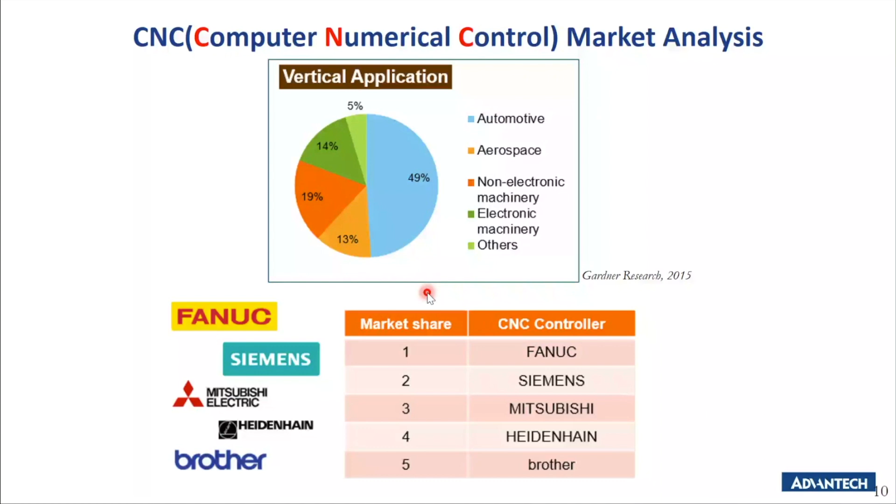Number 1 will be the Fanuc. Number 2 will be the Siemens. Number 3 will be the Mitsubishi. Number 4 is the HEIDENHAIN, and then number 5 is the Brother. So these are all the very popular CNC controllers available in the market.

So when it comes to CNC machines, some of the common CNC production pain points we are going to share with you. In our customer production site, most of the CNC machines are actually offline, meaning they are not connecting to any internet, so you cannot manage them through networking. So if you want to connect it to some software, usually these software are actually very expensive. To those production lines who want to do smart factory or industry 4.0, it is actually kind of overqualified when it comes to project budgeting. So it's not meeting what the customer really needs, right?

And then when you are using a CNC machine, usually in their process program system, you need some data from the machine. So what they need to do is take out the CF card and manually update it. It's time consuming and really very labor intensive for them.

Also another thing customer would like to do is to collect this data and then push this data to some of their existing system. But the challenge is because you cannot access the CNC controller, therefore your data cannot be integrated with some of the existing systems, like the SCADA system. So these are all the pain points from the CNC machine production line and also at the end user side.

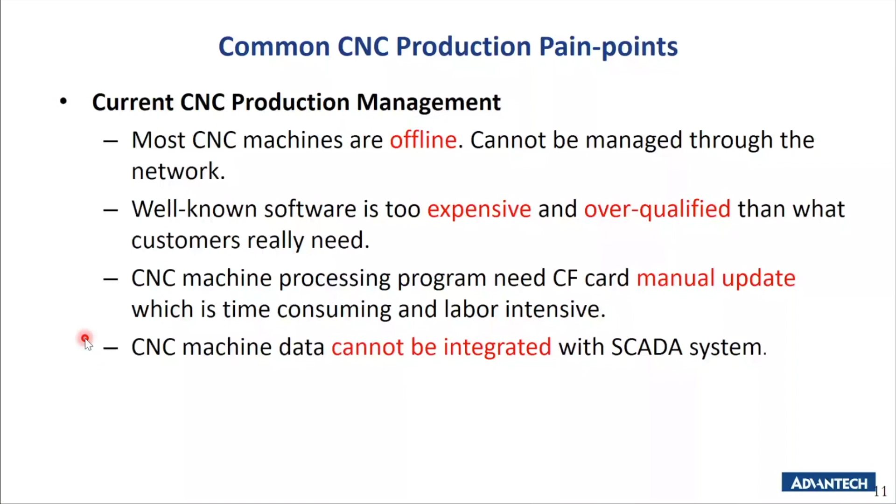So what about our CNC Edge smart box? You can imagine, just now we have such a wonderful software, which is the WebAccess CNC, you can connect to the CNC controller. So we actually put this CNC software inside Advantech's industrial PC. It is a very small form factor, it comes with features like some powerful Intel CPU, and it also has built-in SSD storage for you.

So once this pre-installed WebAccess CNC is built inside, you can actually do the connection of up to 5 CNC machines. Another thing this CNC box can do, it also can connect to the cloud of the Advantech WISE-PaaS. And this box is also expandable, even if you want to do connectivity by wire or wirelessly, like Wi-Fi or LTE, it is also possible. So because Advantech's industrial PC is compact and fanless design, it's very good for your harsh environment. You can actually DIN rail it, and it also supports a wide power range and operating temperature.

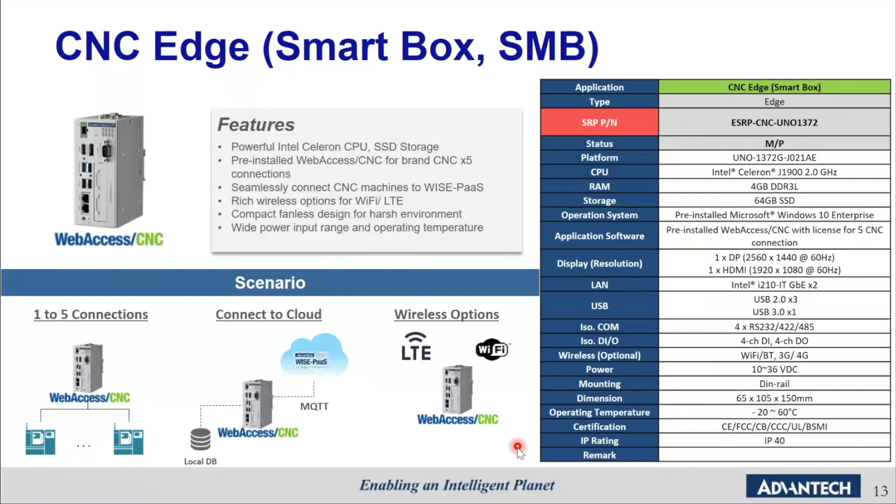So just now we talked about everything about the WebAccess CNC. Now I would like to give you some of the good features for this software. Basically, we will be touching about 7 or 8 features.

The first one will be the overview. Once you log into the WebAccess CNC software, you will go to the overview here. In this overview page, you will be able to identify a lot of information - your device name, main block, the current execution program, status, alarm status, and part count. So basically it's a very good overview for you. You will know whether it's now busy, idle, in alarm status, or whether the machine has been disconnected.

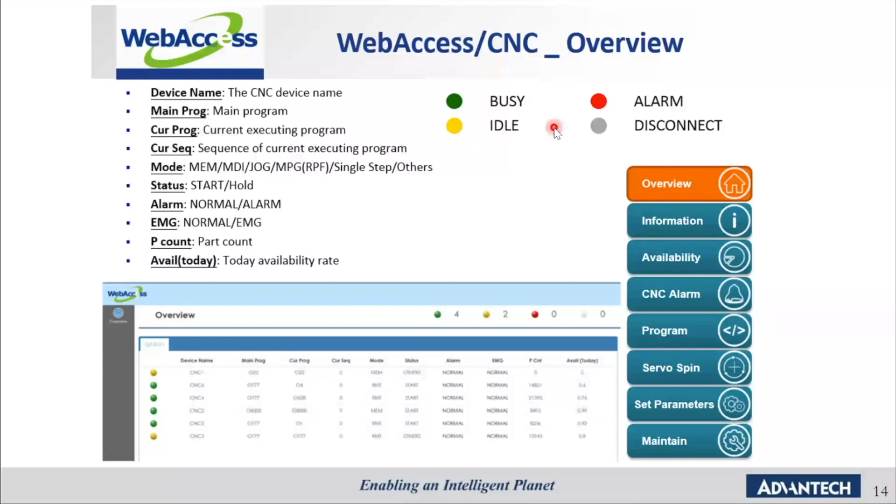Second, you will also know the information about this CNC controller. Here we will be talking about information particularly to the absolute and relative position, some of the part count information, the CNC operating time, and also the G code. This information can be easily obtained from your CNC controller and linked to our WebAccess CNC software.

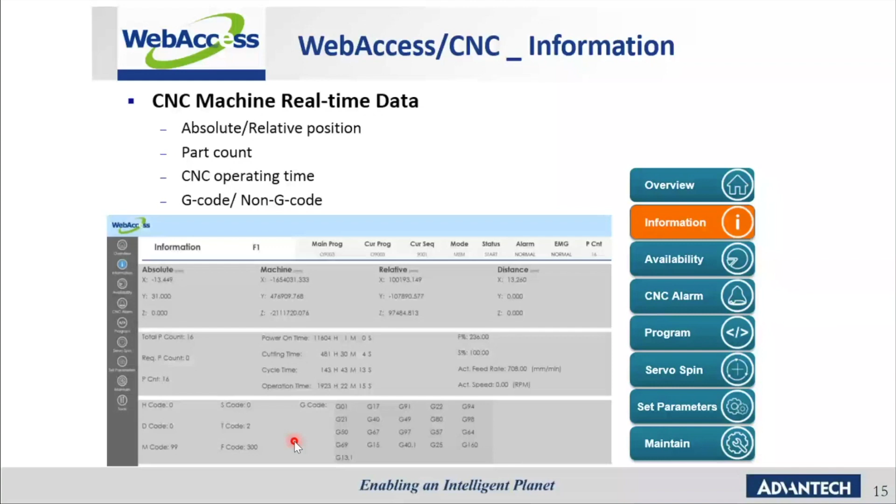Number 3 is always important - knowing the machine's availability. The query tool provides the detail of CNC availability to handle such kind of production efficiency. So if you do the setting, you try to do the query, you want to know a certain start time and end time by a particular date and time. Once you submit it, it will generate the information that you requested. So it's easy for you to know the status, the start time, end time, and total time taken for your query.

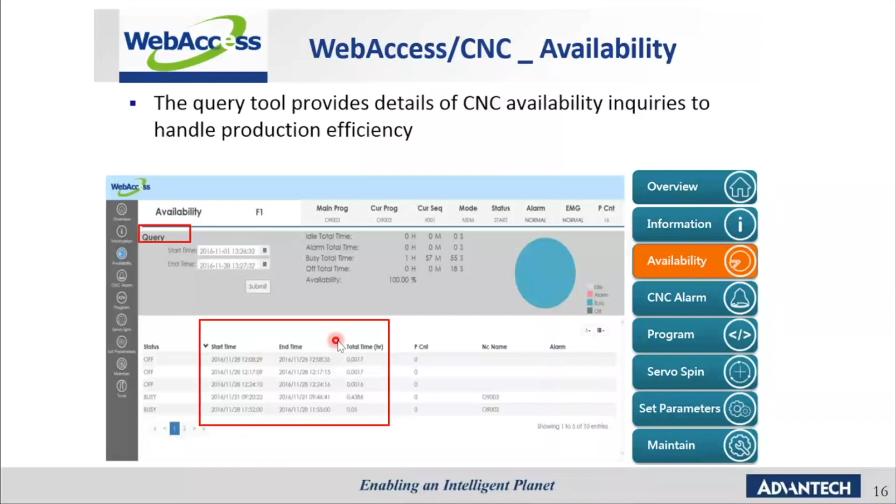Now, next we will let you know about the program. The CNC program is actually for the user to provide an upload and download function for the file they want to use, and an edit interface to program the NC files. These features give you the flexibility to input or export information from a CNC controller. Once you go to this page, you are able to know the file name, the file size, the last write time, and the remarks. So this is also very helpful.

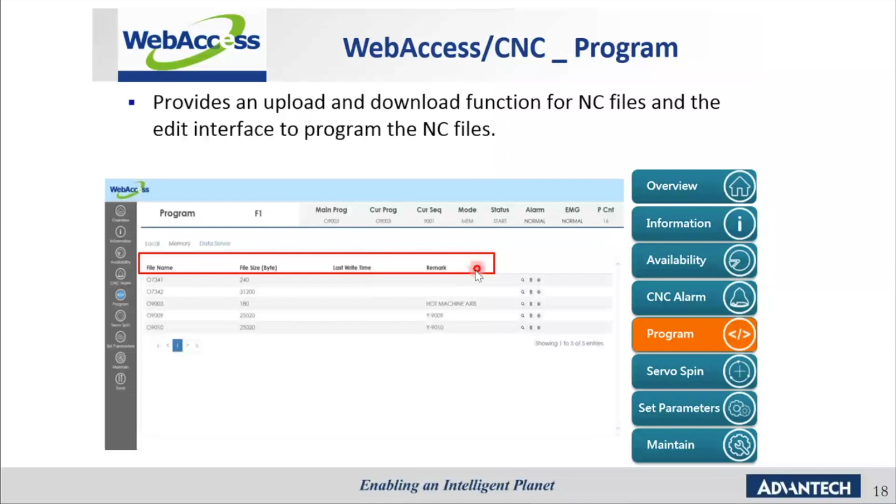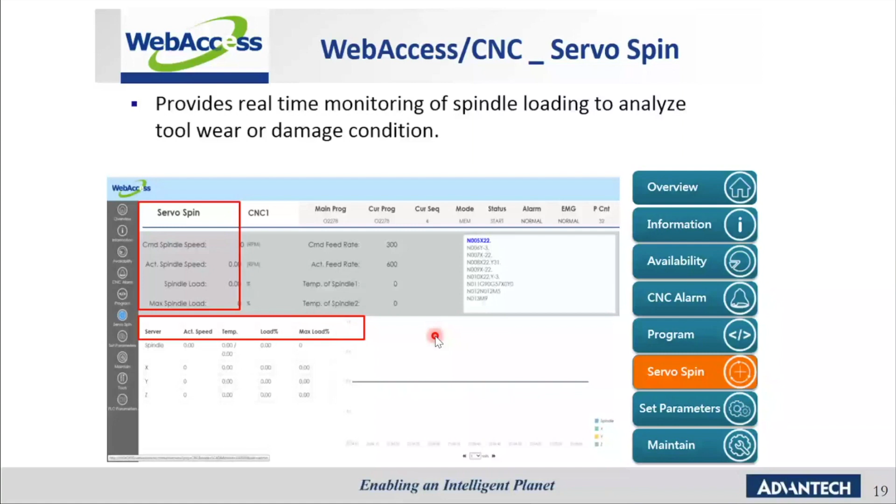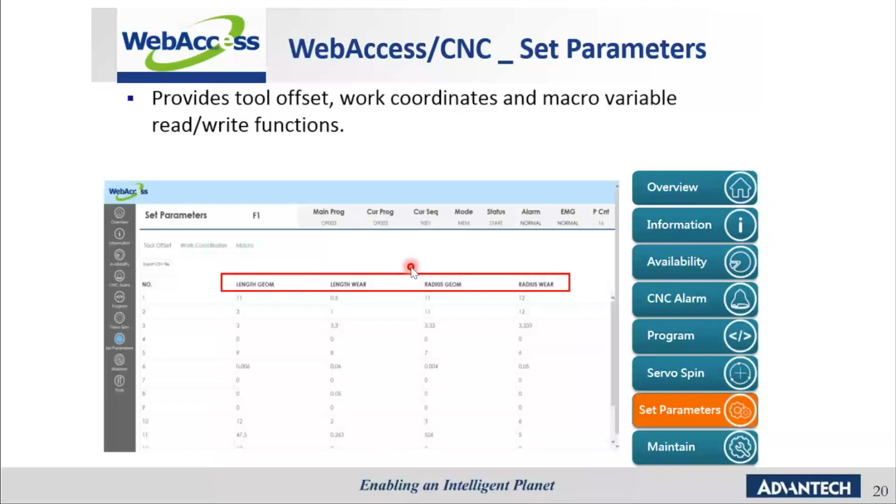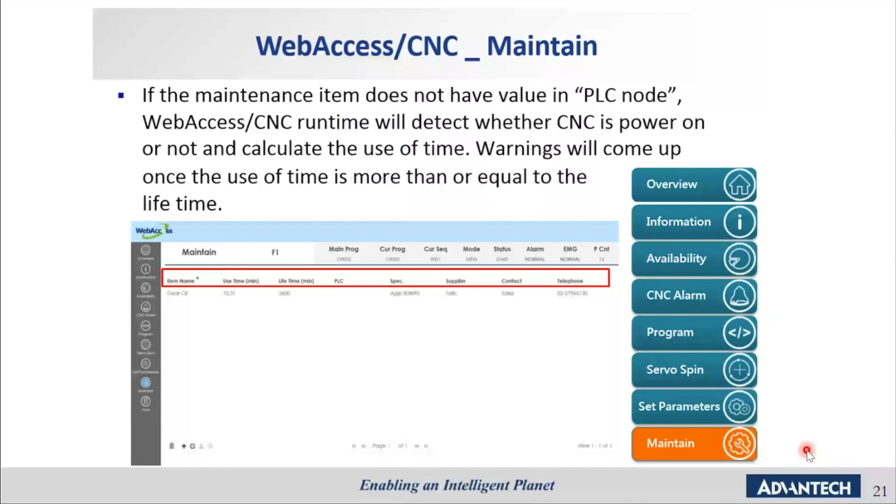All right, so that's all about the CNC WebAccess software. Now the next question from customers is, how do we move forward? How do we enable such kind of CNC monitoring project?

Three steps. First, you have to determine your requirement. You have to discuss how many CNC machines there are, what brand, what CNC control model, what kind of service is the customer's expectation - are they trying to do visualization of the machine operation on the production line, and does the customer have an ERP or MES system, because this is helpful when the customer wants to push this information to integrate with our CNC software.

Second, you need to decide how you want to connect the machine by our CNC Edge. We shared that our CNC Edge can do up to 5 connectivity, so you have to calculate how many CNC boxes you need for your project. And then you want to collect the data - is this CNC box just used as a gateway, or do you want it to push information to your existing backend SCADA system?

In some cases, customers wanted to do more than that. They wanted to make use of the dashboard features of Advantech, which we will share more later, and we support both the cloud service and the on-premises solution.

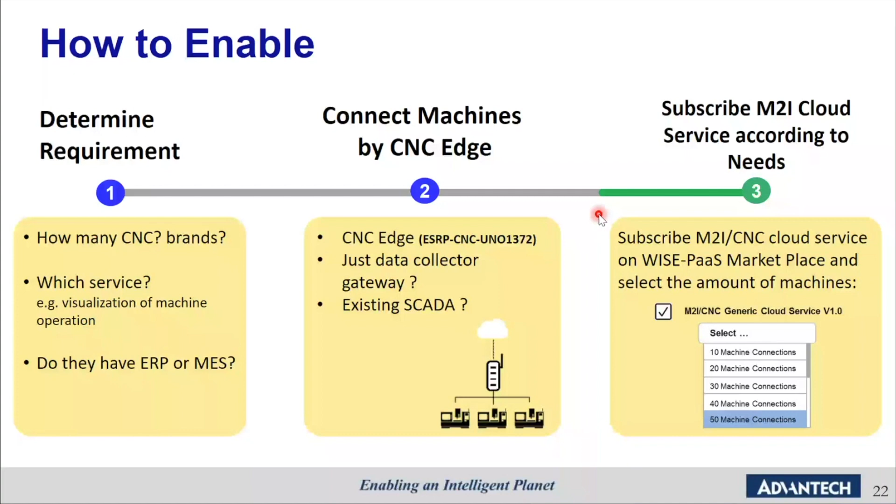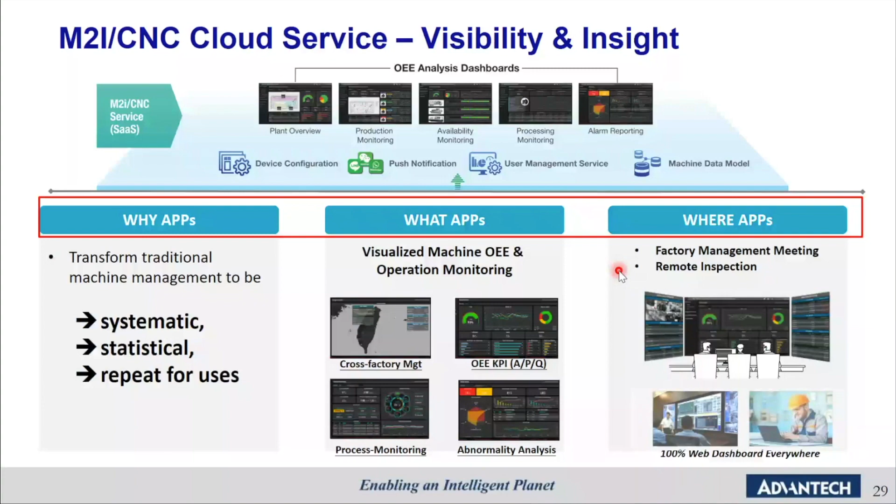Okay, so about our solution offering. Just now we mentioned we have the edge computing to help you do real-time collection. We also mentioned we have our WISE-PaaS cloud, which has all this kind of built-in dashboard ready for you to use.

So in this page, what we are trying to share with you is that besides doing the data collection from the CNC machine on the production line, the factory site may already have some existing ERP or MES system where they handle their work ordering system, production line system. They would like to actually integrate this information into our dashboard.

So this is where we have the flexibility, because our platform actually supports an open API. So if you know how to write a simple script, you can actually push all this information from your other system, from the factory side, and then combine it together with those information from the CNC, and integrate into our ready dashboard features. And of course, if you want to add on some other IoT project, because of the flexibility of our WebAccess CNC software, you also can do the integration right here.

We are talking about things like the Modbus protocol, things like the OPC UA protocol, etc.

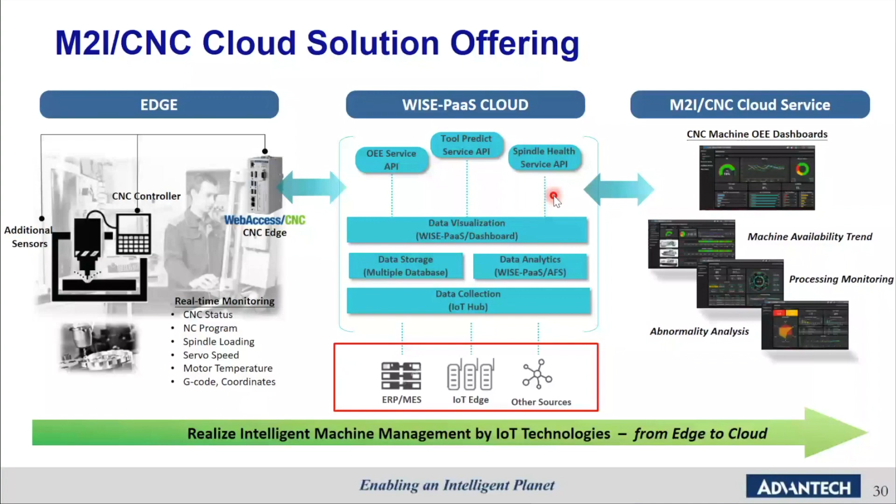When it comes to machinery and MES data integration on our dashboard, the three things we want to help achieve are machine monitoring, your work order process, and tracking your production losses.

This is the kind of dashboard you'll get using our solution. It gives you a very good overview of availability, total downtime, and work order information. You can even insert your production line floor plan and get indications of where the CNC machines are and their existing status - running, idling, or down. On the right-hand side, it also gives you work order information.

This is where your MES system or ERP system can integrate information all together into this single page, giving you a very good overview of the status and what's happening on the production floor.

In summary, you will know all the performance and achievement, get real-time CNC monitoring status, know the alarm history on this page, and it's always important for the operator and manager to take note of the work order progress at the moment.

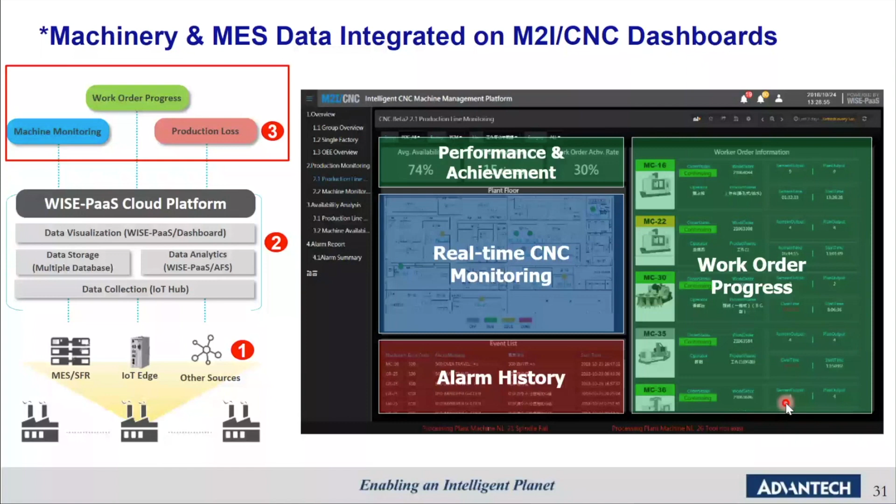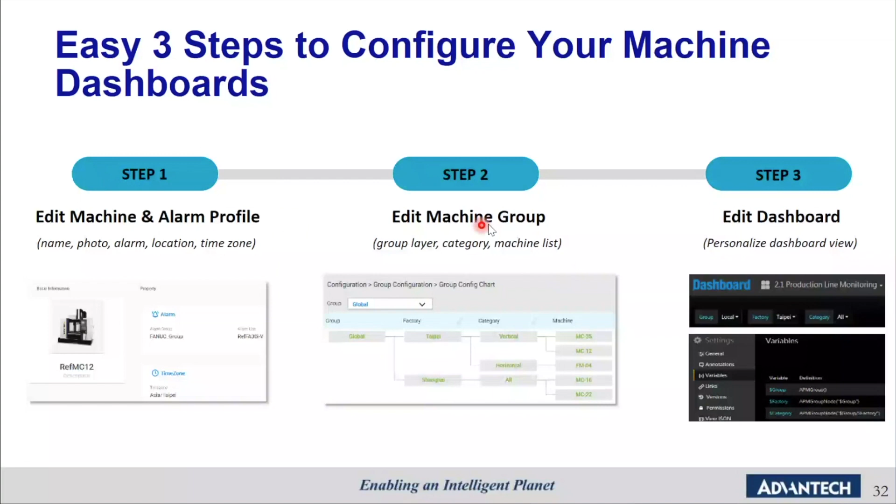Here are the 3 simple steps to use our dashboard. Step 1, edit the machine and alarm profile. Step 2, edit the machine group. Step 3, attach and do the settings of the dashboard itself.

For step 1, the machine and alarm profile - here's the user interface page, let's look at how it looks. You can go into system settings and do your reference property setting. This is where you configure your machine profile, including photos, alarm list, time zone, and other important information from your CNC machine.

For the configuration and alarm configuration, when you go inside, the interface will look like this. You can set up your alarm list according to the CNC controller's model and its manufacturer, which is very useful for you.

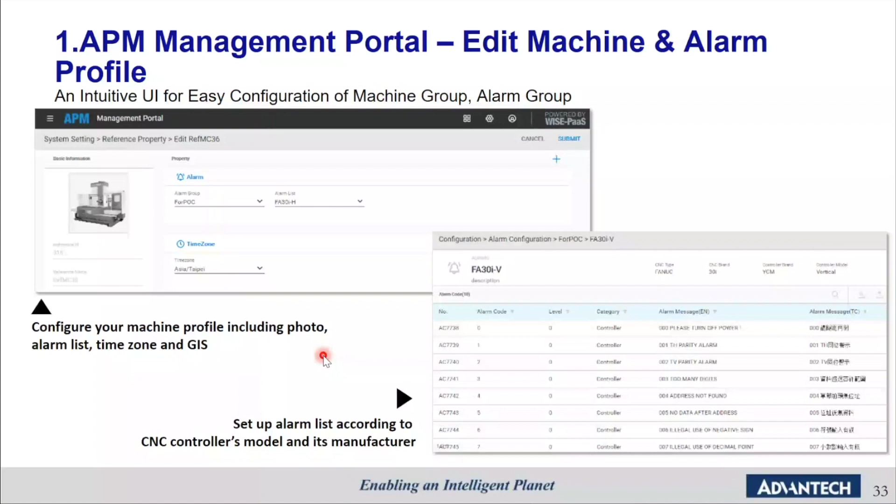Step 2 is for you to edit the machine group. When you log in, you can do the group configuration, which provides you a group configuration chart. By looking at this chart, it's easy to know the connectivity, the relationship between the grouping.

You have a global enterprise, with different factories, for example in Taipei or Shanghai. You can categorize the vertical of the CNC machines, maybe by different customer, or by different type of product you are making. For machines, you can always name them into different machine names.

Once you click it, it gives you all the detail property which we already entered on the last page. So it's to create your machine group according to your production layout, and then you can always click and view the machine info easily.

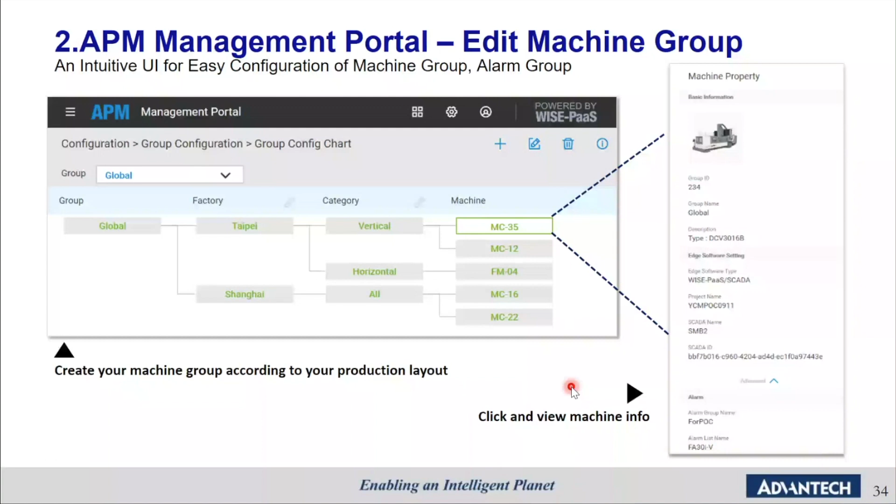Now let's talk about the dashboard itself. When you do the dashboarding, you can imagine such a wonderful, nice dashboard as the achievement and result. At the center, you have one very good interactive dashboard with a good overview of the whole status - production line monitoring, overall equipment effectiveness, OEE analysis, and alarm report.

On the left-hand side, you have some focal points which are very important for you - production line zone monitoring, the machine list, and also the CNC error message.

On the right-hand side, you can have a management scorecard, which is useful for integrating all your work order achievement information - the OEE summary, quality, defect and yield rate, and important downtime summary information. This dashboard can really give you a very good overview of the whole situation and what's going on in your production plant.

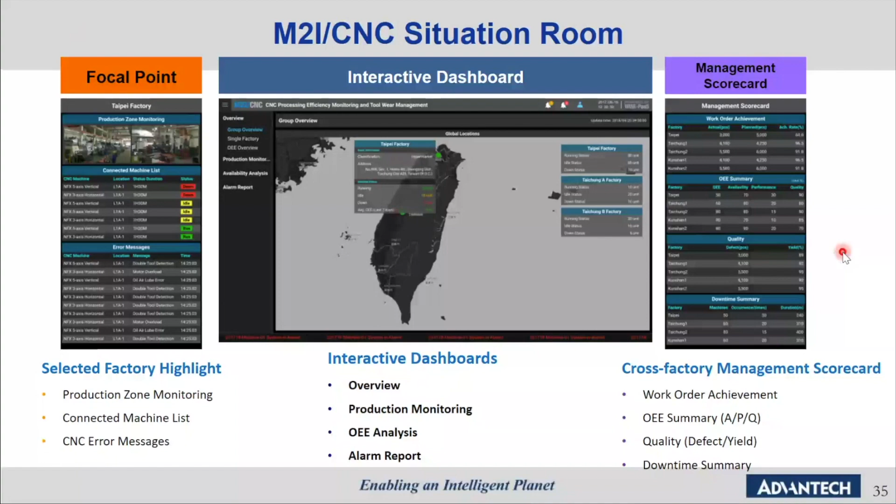I'm going to go a little quicker here with some of the dashboard for the next few pages. For the group overview, you can imagine information like this - real-time info from each site, a good overview of the global group manufacturing sites on your map. As and when you want to know what's going on, you can simply click to different plants and get access to it.

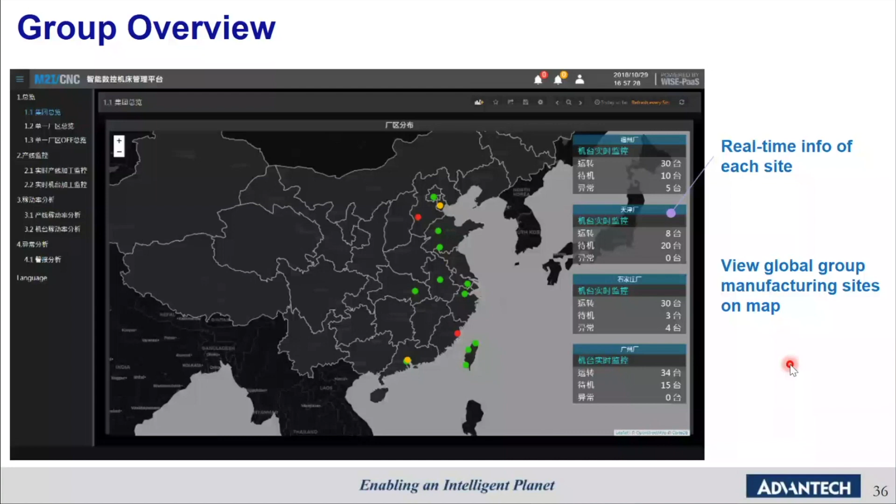When you zoom into the single factory overview, it can give you a lot of comprehensive information for a quick review. We talked about the plant floor, OEE, machine status, and all the APQ, and top 5 production information, the error event, and the downtime machine.

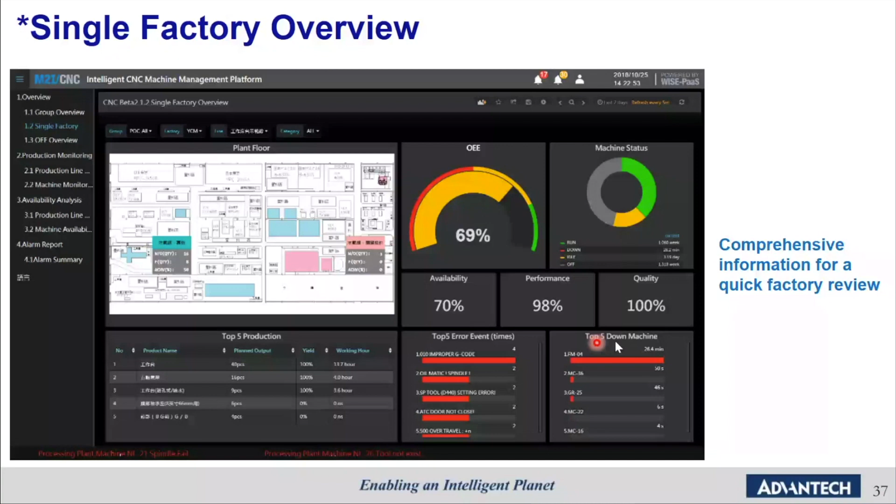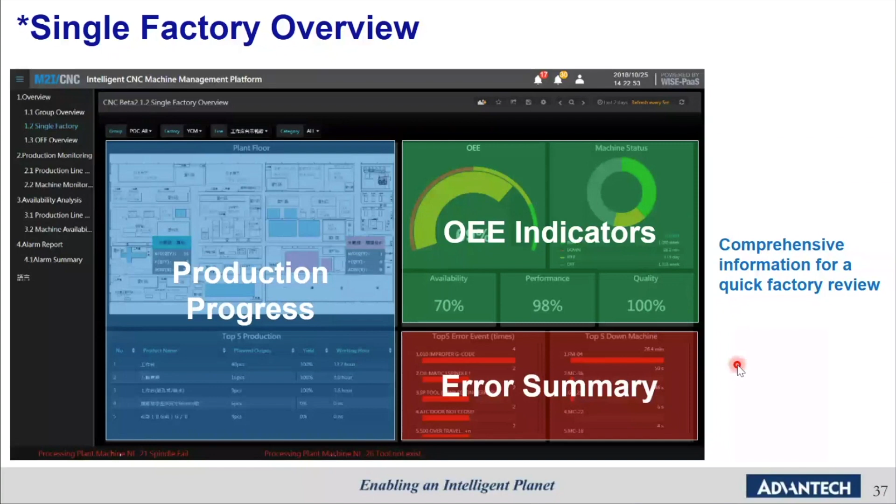You will know all the production progress at the moment, and here you will know all the OEE indications, all the indicators, and also the error summary. So this is a very good and useful single factory overview for you, about the factory's OEE.

When you zoom into OEE, you would like to know the OEE trend chart. It gives you a lot of flexibility by choosing different dates. For example, you want to know how the OEE trend chart looks for the past week - you can do the setting here. Once you query, you will know the comparison: the top 5 work hour abnormality, the yield rate, the error event, and the top 5 down machines, so you can look into it and check things in more detail.

So here's the OEE trend chart. How the performance, quality, and availability is all available on this page.

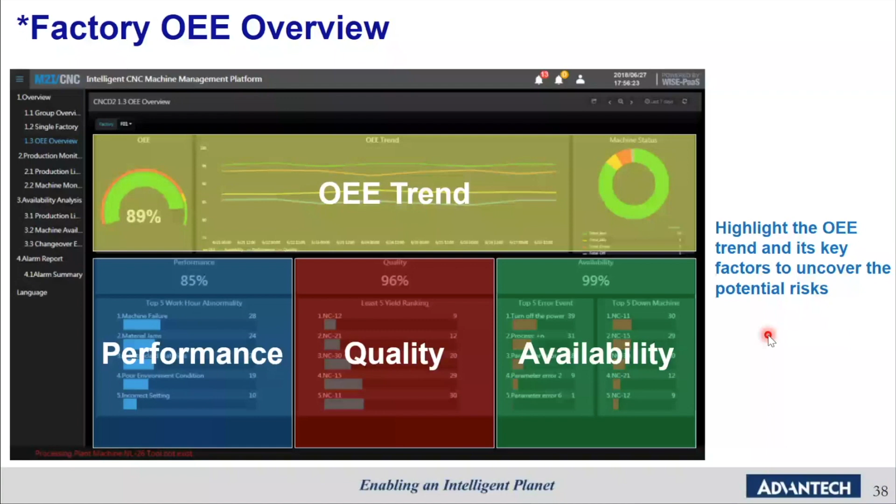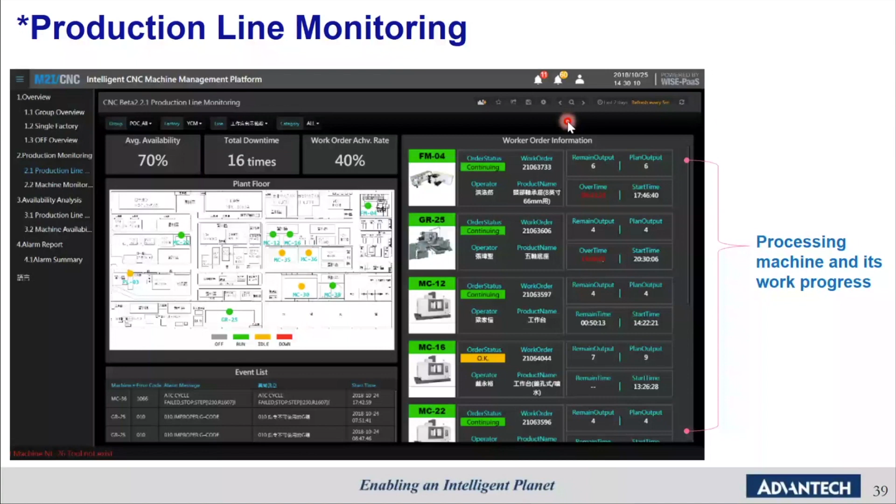Next is about production line monitoring. This is particularly zoomed into the work order information, because it's always important to know how is the progress of each machine, and how is the work order - are we meeting the work order expectation, how is the remaining output, and how is the plan output at the moment. This gives you a very clear and easy overview, so here you will know the real-time machine status on the plant map.

When you zoom into the CNC machine itself, now we are talking about machine monitoring. You will be getting information like how is the temperature of your CNC tool - temperature monitoring of the CNC spindle and multiple axes. It really gives you very detailed information, even by different axes, so you know when to replace or change a new one for your CNC spindle.

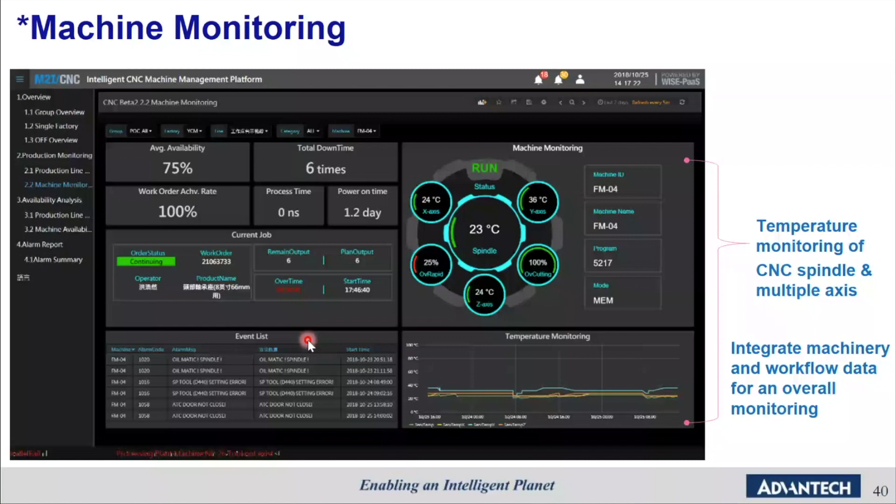And then to integrate your machine and workflow data for an overview of monitoring - how is the trend chart, how is the temperature monitoring trend chart, and also the event list will be available. So you will know all the work progress for today and also the critical parameter monitoring.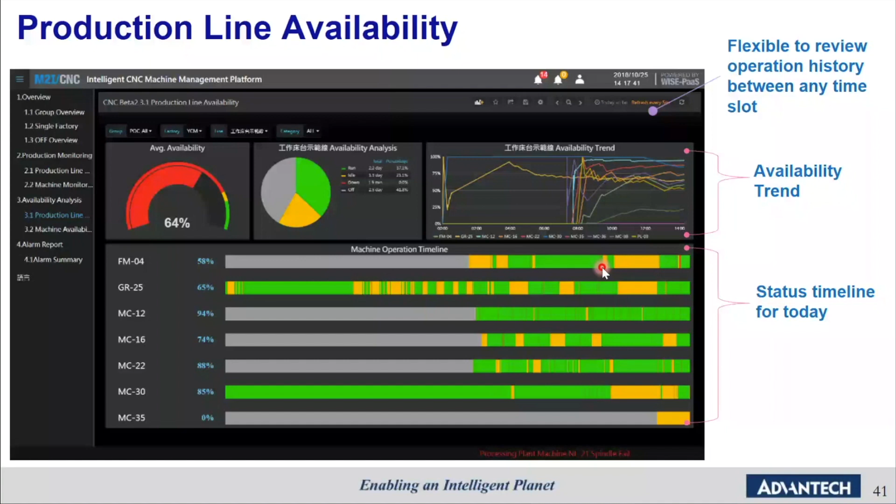This page will give you detailed information about the production line availability. With the similar idea, you line up all the different machines on your production floor, with indications of the runtime, the idle time, and the downtime. This gives you a very good and straightforward information for you to check with your production line, engineer, or manager.

Similarly, when you want to zoom into not only the production line but a particular machine's availability, this is the kind of dashboard you can get. By different machines, you can actually have the machine status of the daily trend and also the machine's status composition.

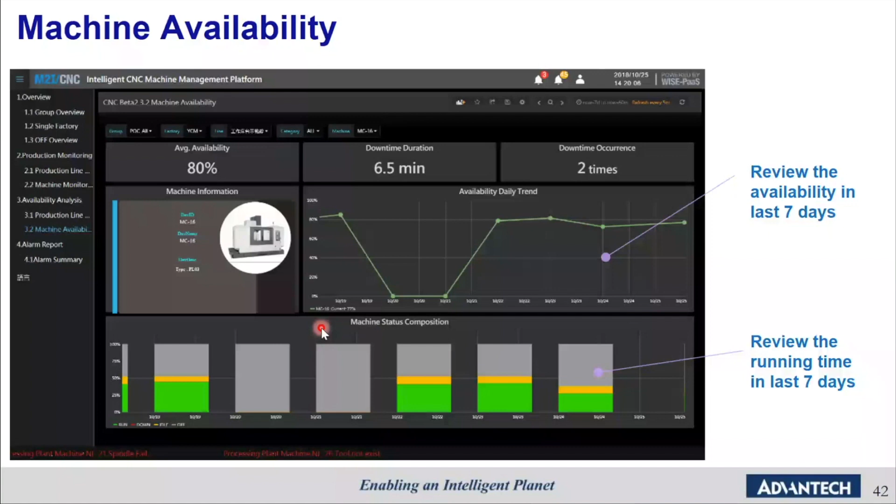Here comes the alarm report. When you zoom into the alarm report itself, it can always give you the counter and information about your critical alarm and also the warning alarm. It's very useful information, getting things like the top 10 alarm event by occurrence, and also the top 10 alarm information by duration, including information such as the error code, etc., and also the alarm trend chart.

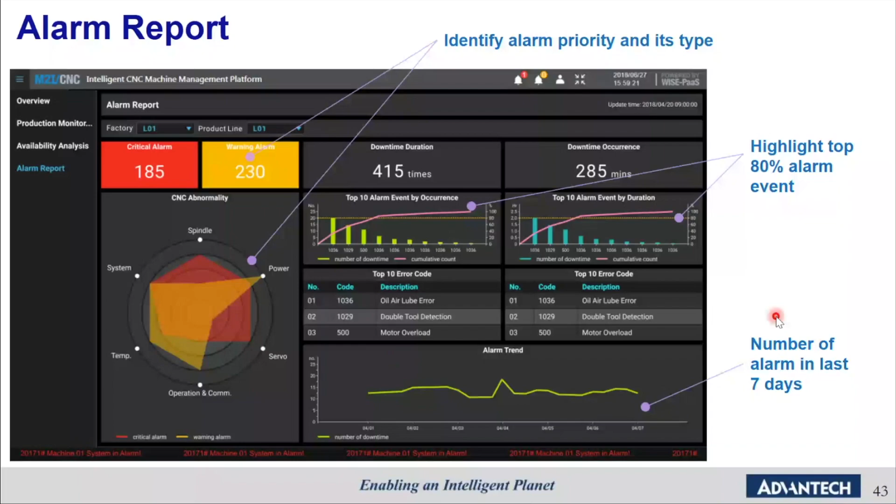Okay, so just now we also have covered all the dashboard functions and features. I'm glad that you are feeling extremely useful and also excited to know Advantech has such a useful solution for CNC management.

So next we would like to share with you some of our successful stories. Particularly these success stories are given by our Thailand team, because in Thailand our team has deployed this kind of project very early, and in Thailand there are a lot of automobile and precision engineering companies.

So project background number 1. You can see this kind of CNC machine on site. This customer manufactures tractor diesel engines and common tractor parts, so they are using a lot of CNC machines.

So how did we use our CNC solution to help them? The bottleneck is, of course, like we mentioned, most of the CNC machines are offline—you cannot connect them to the network. And then it's too expensive, over-qualifying. There's a lot of manual work and it's labor intensive, and you cannot do data collection and push this information to the existing SCADA system.

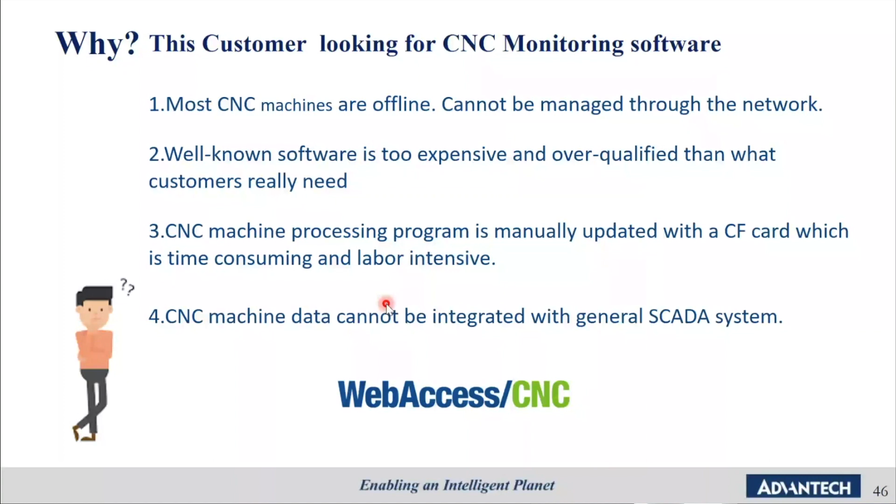So with our solution, we are able to help them do the CNC data collection. Because our software supports the OPC protocol, it is able to push this information to the customer's existing SCADA system, so the customer can achieve what they wanted at the back end. So this is how we helped them.

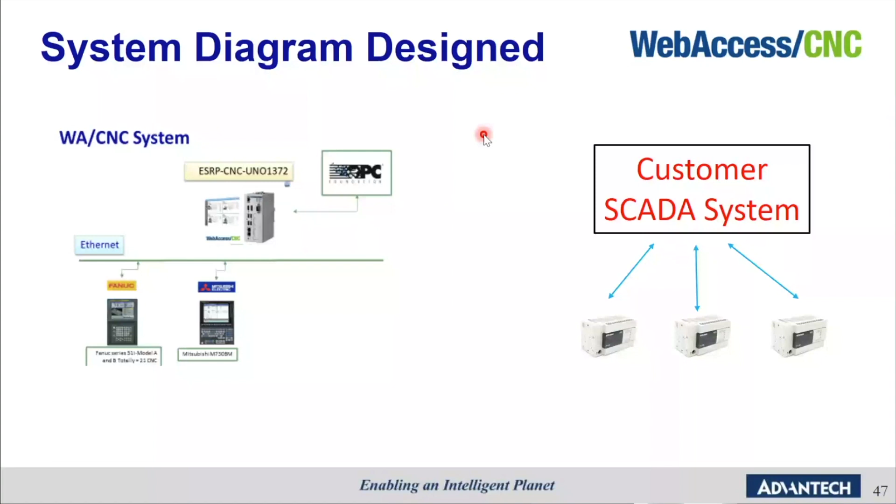So this is an example of how they connect to the Mitsubishi M-series CNC controller. When you connect to the Mitsubishi controller, you can expect this kind of information from the controller, and these are the kinds of information we can access and then push to our WebAccess CNC gateway.

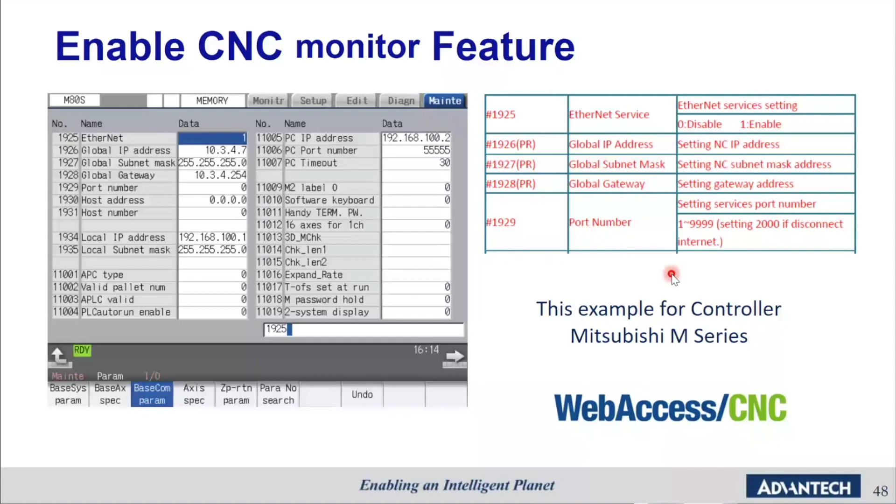And this is an example of the FANUC controller, which is also the number 1 very famous CNC controller worldwide. So we are also able to collect this kind of information and access it through our WebAccess CNC software.

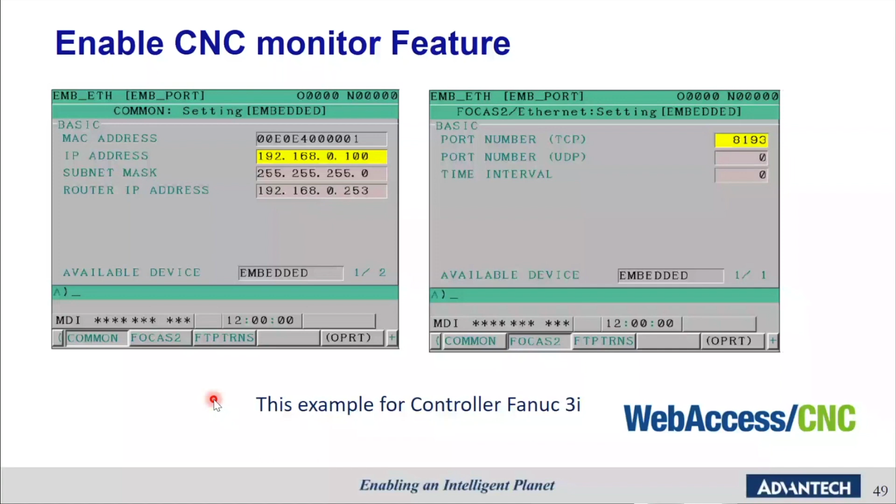So with the data collection, you can expect this kind of information. Just now we talked about all the useful CNC dashboard features, and all the information can be obtained here.

So the value-add information given and fed back by the customer really helps them reduce a lot of CNC downtime, because now you have good and immediate information to know the machine status. That's why you can react very quickly and assign the right manpower to tackle the right problem. So this will definitely help you.

And then there's a lot of flexibility for them, because previously they couldn't connect the data and had so much manual work. Now they have the flexibility to collect data from different CNC machine types and different CNC brands.

And for them it's of course much easier to meet their KPIs, from their technician's point of view or their production engineer's view, because now everything becomes so easy, visible, and transparent for them to manage and adjust accordingly.

And with all this information, such as OEE availability, material planning or check-in, or how the work order material is progressing, this information is always handy and easy for them to plan things ahead—for example, to order shortage materials in advance.

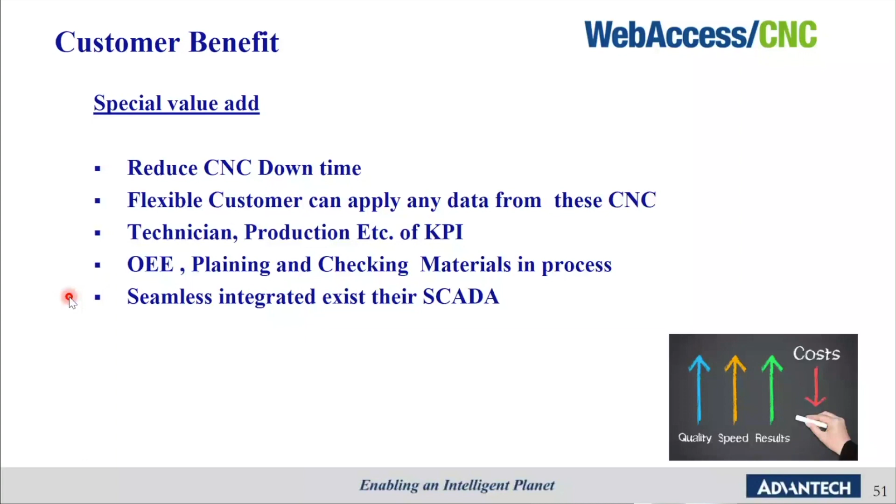So the key point summary is our CNC software—the project has been really successful, because it was easy for them to apply it to their existing old SCADA system. And based on feedback from our team in Thailand, no one else could actually do the connectivity from the FANUC CNC controller except Advantech's WebAccess CNC software.

So this is the second and last project I want to share with you. It's a similar concept—this time the manufacturer makes electrical mechanism parts. With a similar idea, some customers may have SCADA software on site, some may not, and some customers have the problem that they cannot integrate with their existing SCADA system.

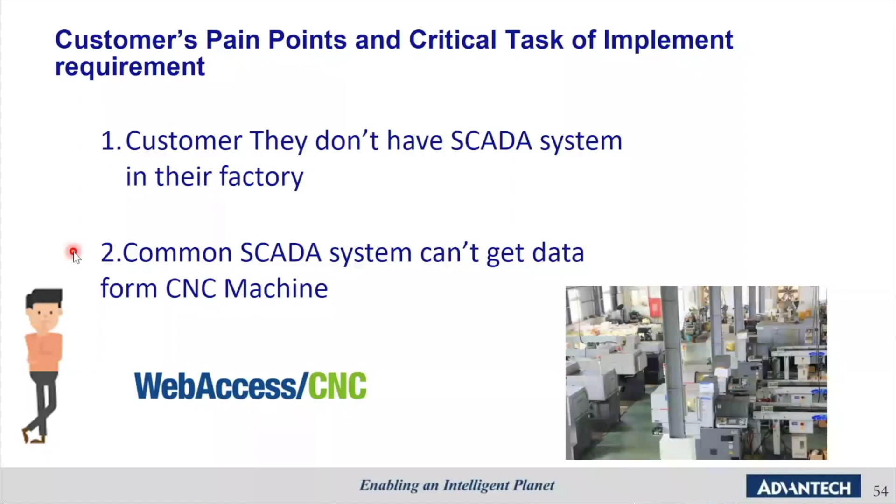So for our solution and proposal, we can actually support this kind of software key license on any computer. Meaning if you have a computer on site, and your idea is just to use WebAccess CNC as a gateway to do data collection, you can actually also do it.

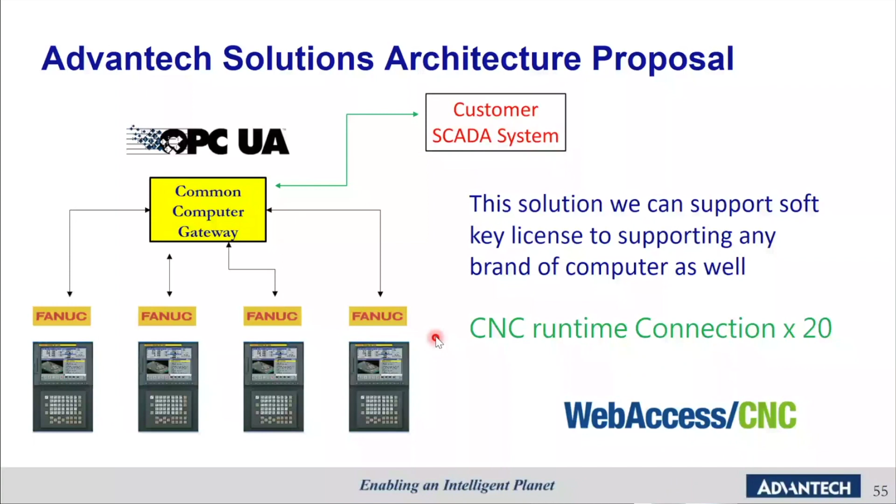So the project benefits will be, of course, to help you reduce the maintenance time and downtime for your production line. The customer can have real-time monitoring of CNC status, and most importantly, the customer can easily reduce operation costs and have a better ROI for their projects.

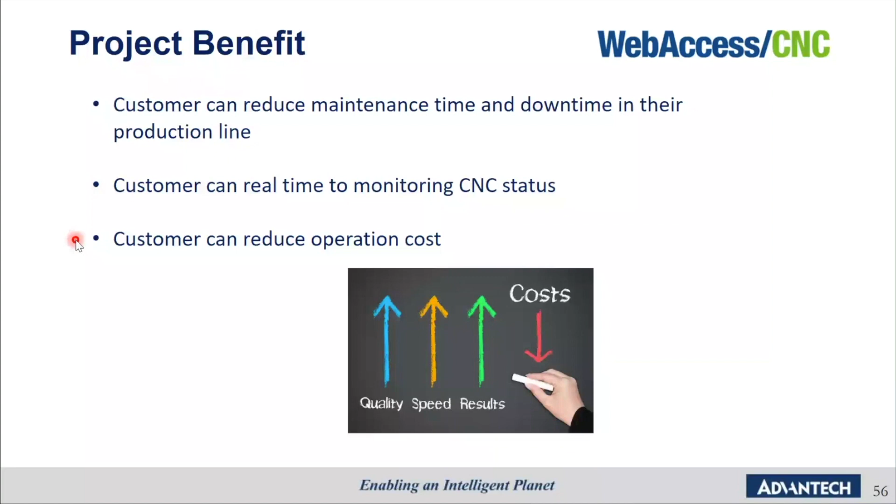So similarly, this is the key point - the flexibility to deploy into various kinds of computing platforms. And also the special point about Advantech software is the ability to connect to the Fanuc CNC controller.

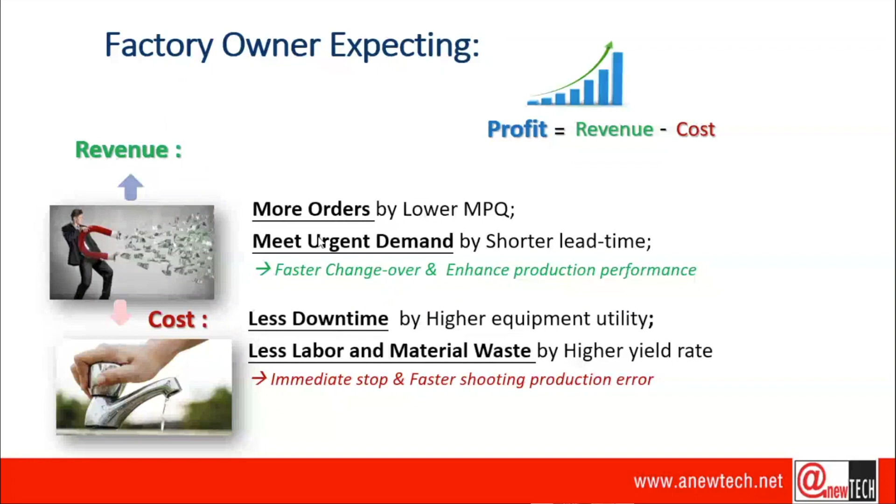With monitoring systems, it will help reduce your machine downtime, resulting in higher equipment utility, and also less human resource and material waste, resulting in a higher yield rate. From here, you can do an immediate stop-and-shoot, faster troubleshooting of any production error with the correct monitoring solutions.

From the three pillars of a project, you're looking at it from an industrial engineering point of view, an operational technology point of view, and an information technology point of view. In a factory manufacturing environment, these three teams need to come together and have a common understanding of the approach to any project, whether an OEE project, a smart energy management system, or an intelligent shop floor data acquisition system. All three teams will be involved.

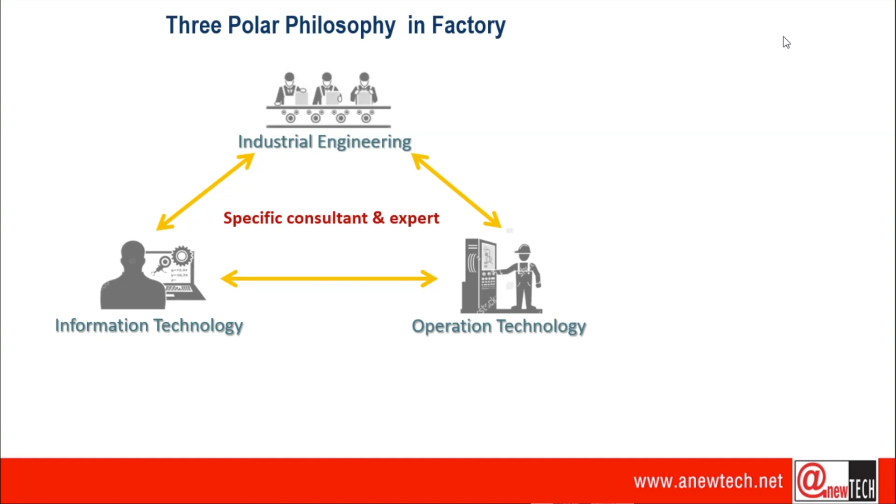In terms of the core proposition of an iFactory using standard products, we base it on some operation technology common tools to help the OT team communicate with the IT and IE teams, and to achieve the first landing of Industrial 4.0 projects. You need a very convincing architecture so everyone is in sync, so when the project runs, we can minimize costs, do good project management, and have everything go in line to achieve this philosophy of smart manufacturing.

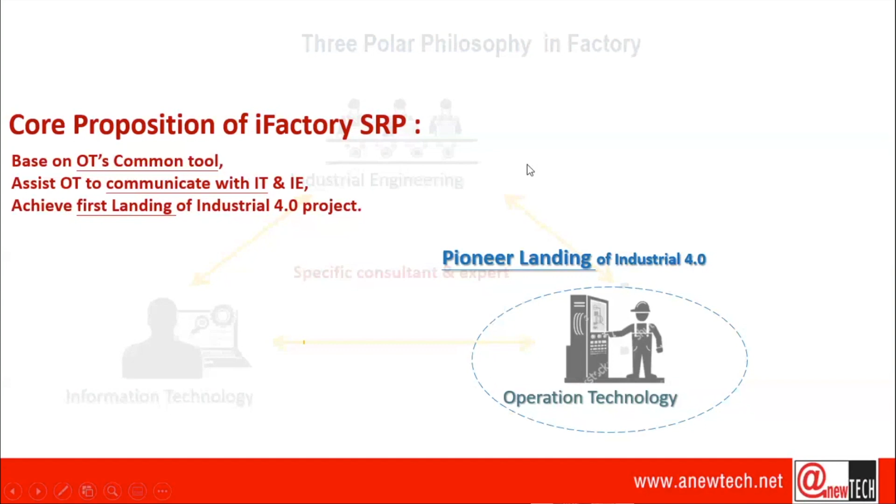So as Alan explained, Advantech provides a lot of smart boxes, whether for CNC, injection molding, or the OEE box, or to take care of robotics handlers and so forth, or even semiconductors, protocols, SECS/GEM, and so on.

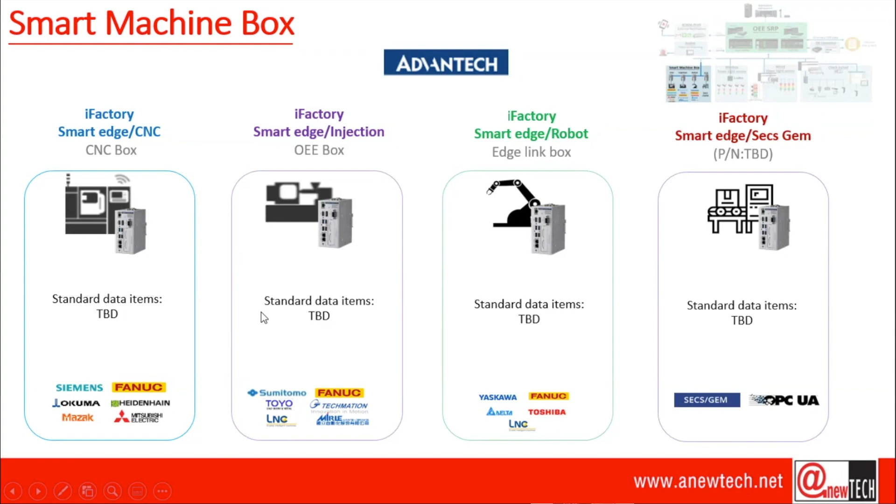So Advantech has all these boxes, and when Alan explained all the dashboarding and all this, I think a lot of y'all will be thinking, actually, how do we do that? How is the first approach? So my next slides will give you some solutions.

So basically, in order to do the approach, right now for Anewtech, we are really not an automation company. So we are partnering FlexSpeed technology to go into helping some of the MNCs or some of the SME business owners or precision companies who want to do up the I4.0 data acquisition. As FlexSpeed, they are providing a total solution for automation, with very good knowledge and domain know-how in terms of CNC machines, industrial automation, robotic handlers, machine tools, storage solutions, and also engineering solutions.

So with this partnership, both FlexSpeed, Anewtech, and also Advantech supporting us from the headquarters level, we envision that the whole team will be able to seamlessly implement the I4.0 projects and CNC machine monitoring solutions. We are going to provide the benefit of maximizing the level of engineering and domain know-how. And with this cooperation, the cost of ownership will be very low because the time to implement the projects is low, as the three of us already have mutual understanding in terms of a working relationship.

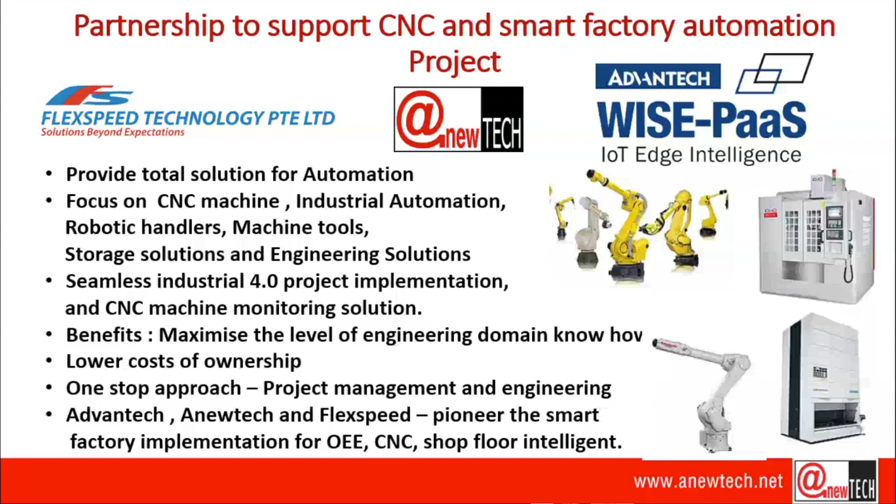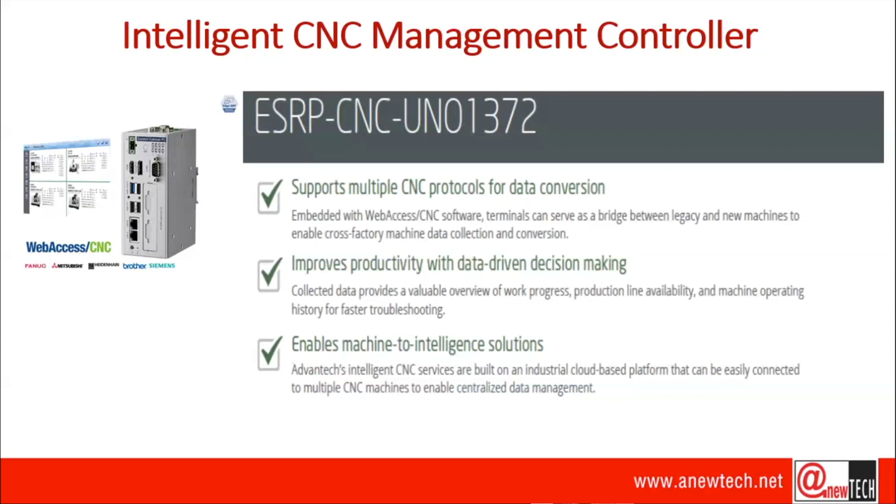I think I will not talk very much because Alan has covered a lot of this. Basically, this CNC management controller, we have already tested together with FlexSpeed with some of the Fanuc controllers or the Mitsubishi CNC controllers in their factory shop floor. So the integration will be very smooth and simple.

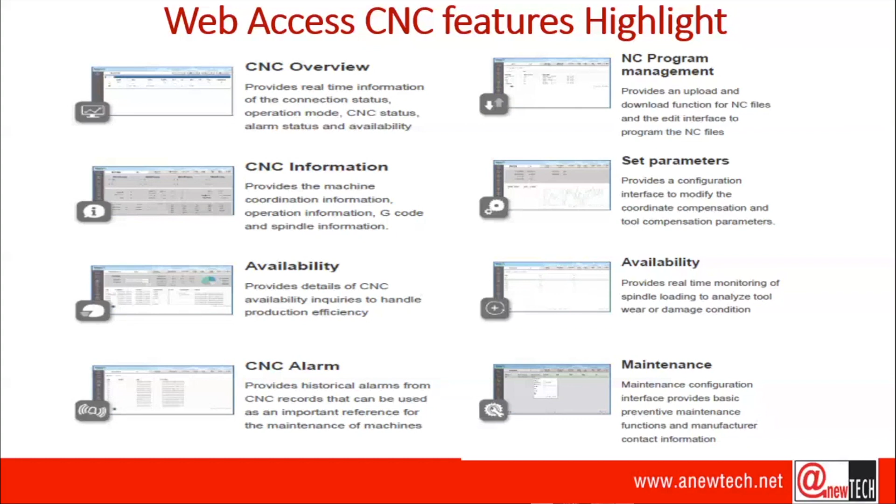There are a lot of features that CNC monitoring can bring forward to the adoption, like the overview of the CNC machine, the information, the availability, any alarm, and even NC program management. Like Alan was mentioning, in the past you needed to use a CF card, but right now with this you can do remote upload and download of CNC programs, setting up parameters, understanding availability, and also gathering predictive maintenance information if you go on with the projects.

And then the other thing that Alan did not cover, we also have what you call check-in and check-out HMI devices. Advantech has already released this. This allows shop floor machines with a CNC machine or injection molding machine, if you don't have a system to do the entry - like who is the operator, what is the lot number, what is the alarm and all this - you can actually use this check-in and check-out system to capture all the faults, all the alarms, so that you can populate the dashboard in terms of the data, the availability, the APQ.

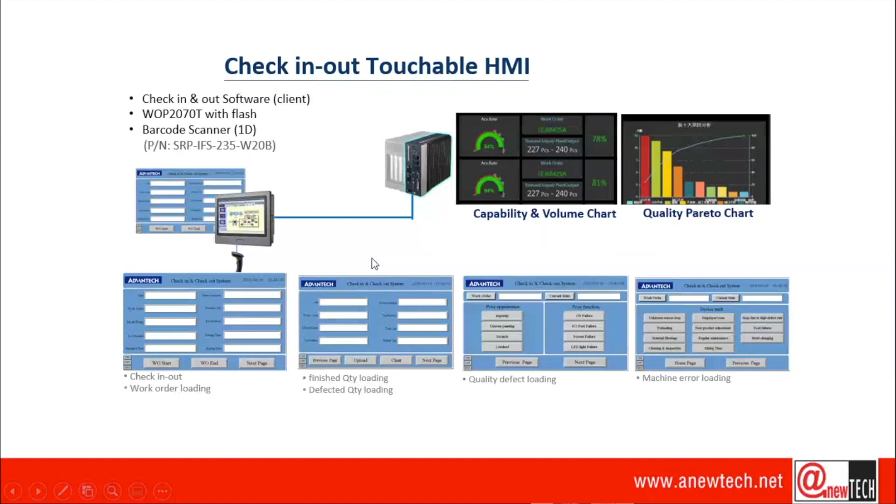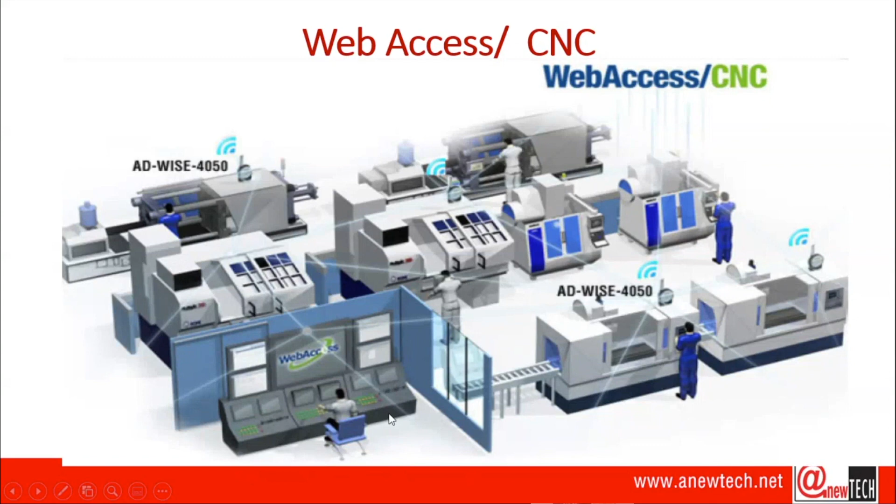Basically, I think in terms of overviewing, WebAccess CNC can actually do the entire monitoring of a shop floor. And also, there's a lot of requirement nowadays to use smartphones to monitor, so we can work with FlexSpeed to develop an application helping you monitor machine maintenance, servo spin speed, and so forth in terms of machine management using a mobile app.

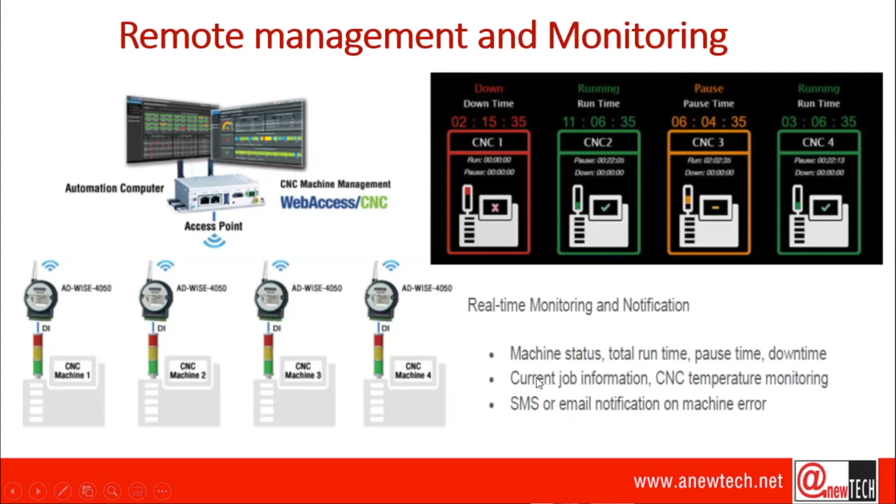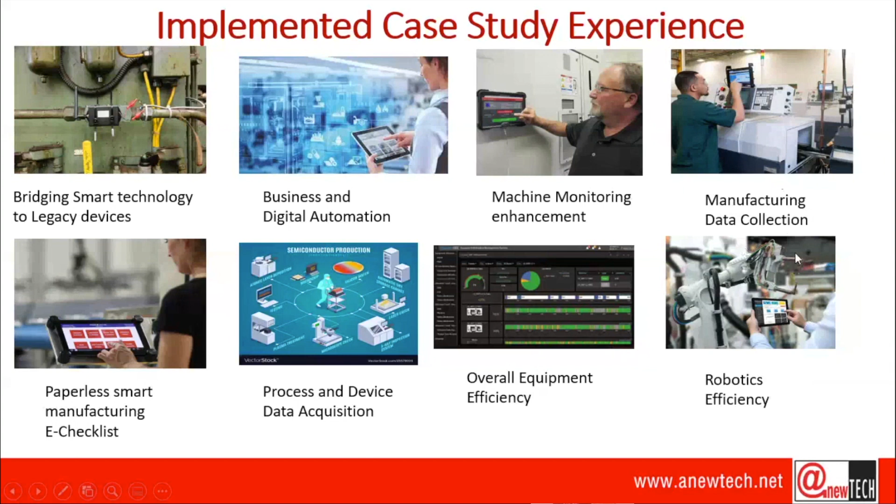These are also some case studies showing different types of CNC machine models. They can be hooked up to WISE-PaaS EdgeLink, then to the WebAccess SCADA, and all the way up to the iFactory solution.

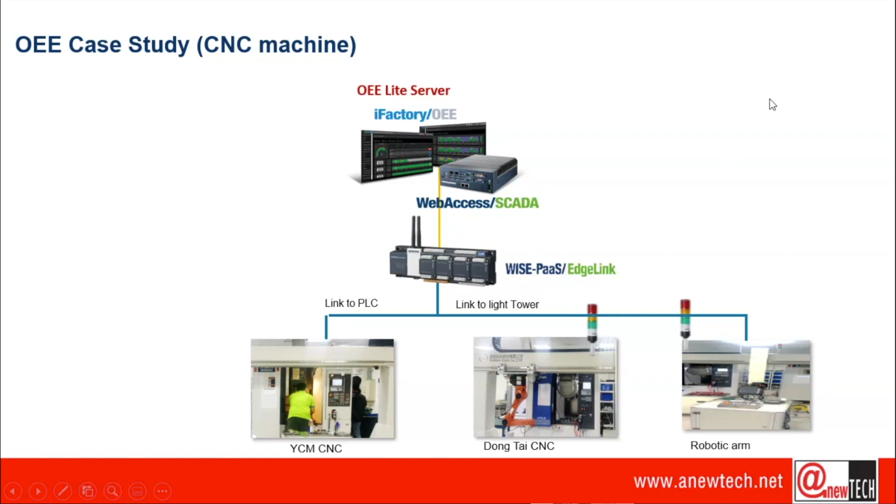This is one project we worked on together with Advantech for a company that we serviced. We deployed some WISE digital I/O to monitor the progress of these so-called EDM machines, gathering all the information from the machines and also the handlers working together with the machines.

After this successful POC, we are now planning integration of another 24 units of CNC machines using the same approach and strategy to cover this new project.

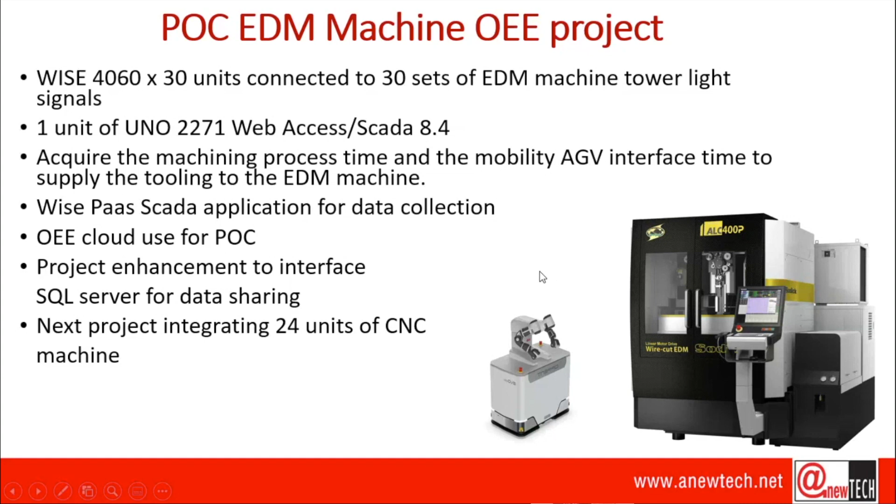If you have any requests or inquiries, do approach Advantech and ourselves, and we can work out those solutions for your requirement.

That's my last slide, and the key takeaway here is that by partnering with Advantech, we are able to deploy a lot more WISE-PaaS solutions, and we also want to build alliances with automation system integrators, solution developers, and machine builders.

Our ecosystem working with FlexSpeed is a very good model that we started off with. We go to market together, building our ecosystem for successful implementation of Industry 4.0, and we are looking for pilot projects to start with.

The overall incentive that we want to bring to the market is to save time, save effort, increase productivity, lower startup cost, and lower risk.

Also, if some SMEs or customers need to apply for a grant, we can come together as Anewtech and FlexSpeed. We are all SMEs, and we can work together to apply for a grant and get better funding from Singapore agencies like Enterprise Singapore.